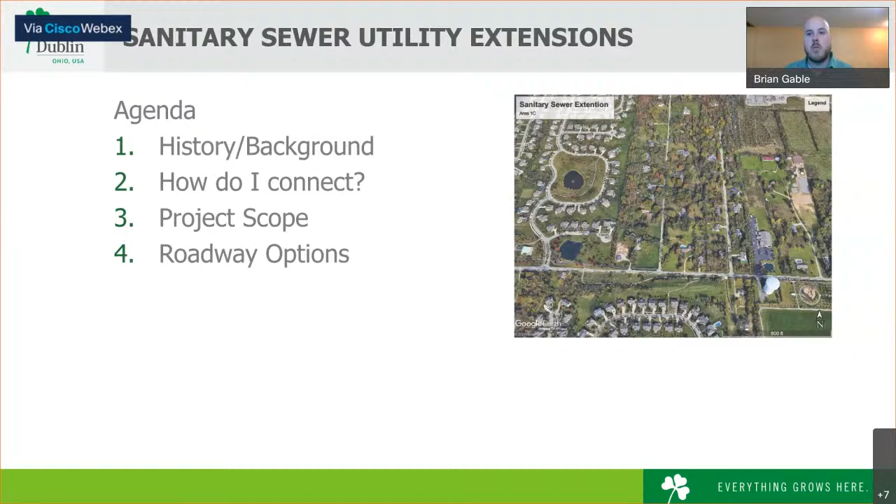As we mentioned last slide, 1B is the focus of the meeting tonight. I'm sure all of you are aware as residents in that area, which is essentially Trails End Drive almost entirely.

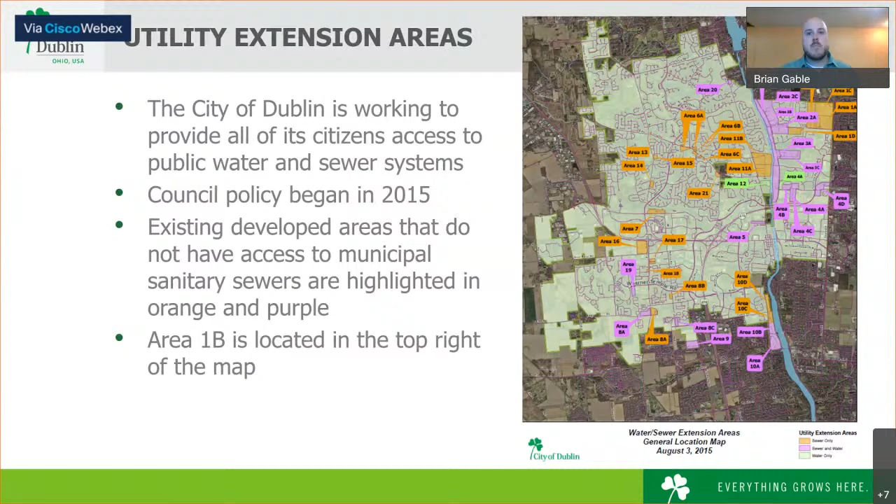The project is going to be 100% funded by the City of Dublin's design and construction costs for public utility extensions. Funding is proposed in the 2022 CIP. I say proposed only because that is something that is accepted by council towards the end of the year. So next year's CIP will be accepted by council at the end of the year. Modifications can be made up to that point.

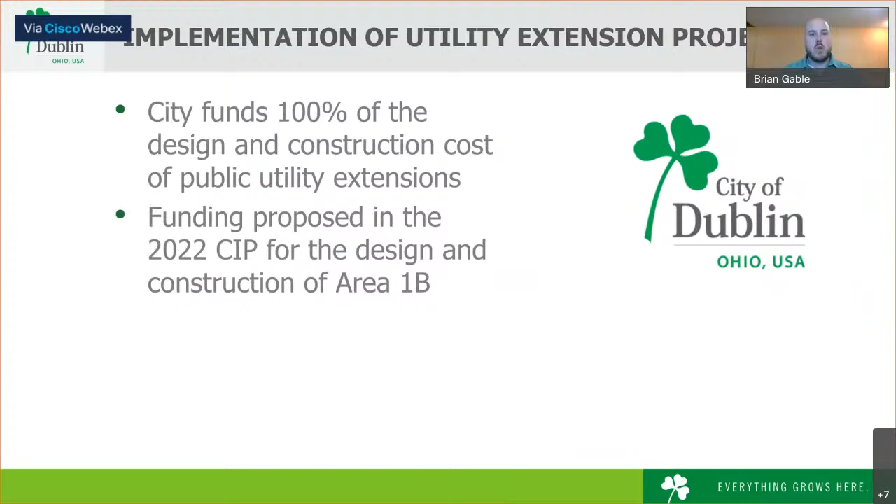So we're pushing for installation of sanitary sewer in Area 1B for 2022. That's very brief history. Obviously there's plenty more that we can discuss, but we didn't need to go into entire detail. Welcome to answer any questions on that afterwards. So let's talk briefly on how to make the connection.

So first and foremost, what will happen is the project will come through and install the sanitary sewer. From there, the residences will be able to make the connection.

So they'll first submit a Dublin right-of-way permit application, then submit a permit and plan for review and approval to the City of Dublin. Once those are accepted, then you'll apply and pay for the Dublin and City of Columbus sewer charges and fees.

The sanitary services and water services are maintained by Dublin, but they originate from Columbus. Columbus has the plants that take care of our sanitary and water systems, hence that's how they have part of their fees here.

So from there, once you have the approved permits and everything else, you can hire a contractor to install your service line from where it'll be left with the project. Then the contractor will coordinate those inspections with both Dublin and Franklin County.

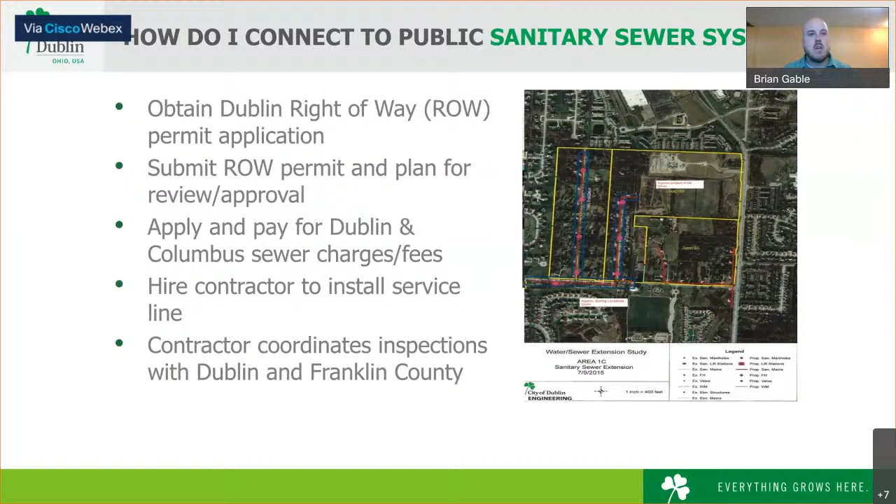A couple things to briefly talk about: the owner responsibility for the sanitary sewer. The sewer main itself is the city's responsibility for maintenance, but the lateral, once it exits the main for the sanitary sewer, is actually the homeowner's responsibility all the way from the main into and through the house.

Property owners are also responsible for the tap fees and capacity charges, which is more of a standard bill. Private service lines from the main to their structure, and then any modifications made interior to the house, would be something the private resident would have.

Meaning if you're switching from a septic system and there was something you had to do to make that transition, your contractor would take care of that, but those fees and costs would be borne by the resident.

One thing the City of Dublin is doing is offering a waiver of 50% off of Dublin's tap fees and capacity charges for the connection, as long as the connection is made within 2 years of notification of availability. Meaning, once the sanitary sewer is fully installed on the street and residents are notified that they're able to connect, there'll be a 2-year window to get 50% off of the tap fees for the City of Dublin.

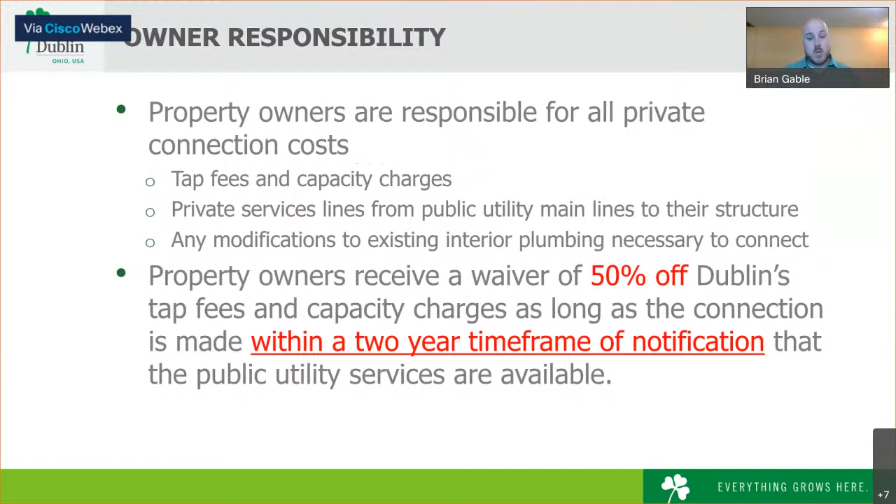Unfortunately, that's not for Columbus's tap fees, as we'll get into on this next slide. So here's the current numbers. These do change slightly over time, so take these with a little bit of a grain of salt. They could adjust from now to when the sanitary sewer is installed, but these are the current fees.

So you see Dublin's charges and Columbus's total about $5,254. With the 50% Dublin waiver, we would get to around $4,149. As I mentioned before, there's an inspection fee, and then you'll have your own private contractor's construction costs as well, for taking the lateral from your home all the way up to the main. Those costs can vary depending on what kind of system you need, anywhere from a few grand to much more if you have to go into a non-gravity fed system.

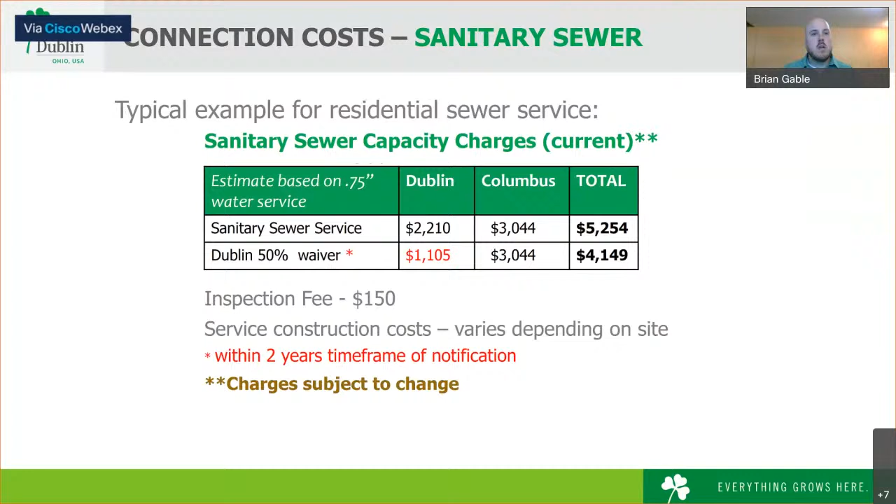So this is just kind of a visualization of what's each homeowner's responsibility.

Since Trails End already has water, I'm sure most of you are aware that the water line up to the Corp Stop line is city responsibility. For us on this project, we're going to talk specifically on the sewer main, and from the sanitary sewer main, where that lateral makes a connection to the main, from there out is the homeowner's responsibility all the way up to the house.

So there are some things that, as you're progressing and making these connections, you'll have to do, such as abandoning your existing treatment systems, extending the laterals, and making adjustments interior as needed.

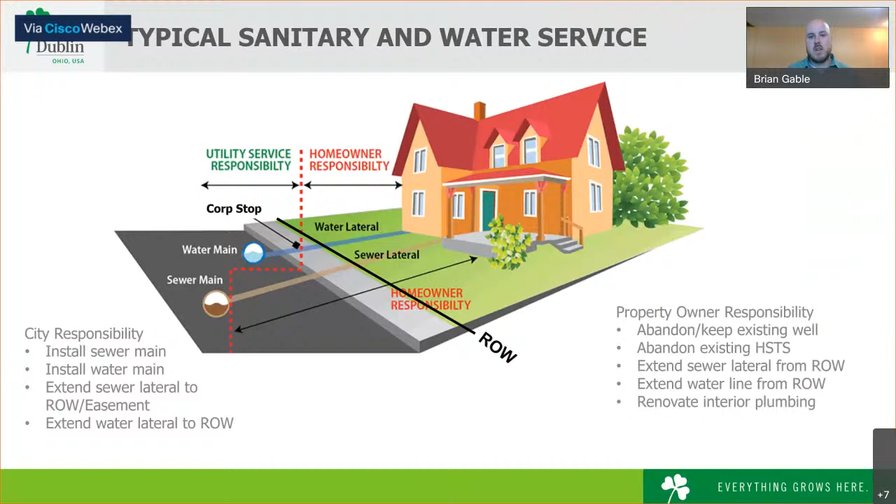So once we finish or get moving along with the project and construction, City of Dublin's engineering staff will send out a sanitary sewer lateral exhibit. This is something that you will need for your permit.

It's one possibility of what could be done. This does not mean that this is the exact layout you have to do, or that it's the layout your contractor prefers. They may want to make adjustments to this, and that's okay. This is just trying to provide this service to help with putting together the permits and exhibits, et cetera.

These will get sent out once the project is actually under construction and you're getting closer to being able to make that connection. We don't want to send these out too early. If the project isn't going to be constructed till next year, finished maybe at the end of next year, you'd be looking at an exhibit from a year and a half ago. So we'll wait closer to construction in order to send these out so you guys have the most current and accurate exhibit that we can provide.

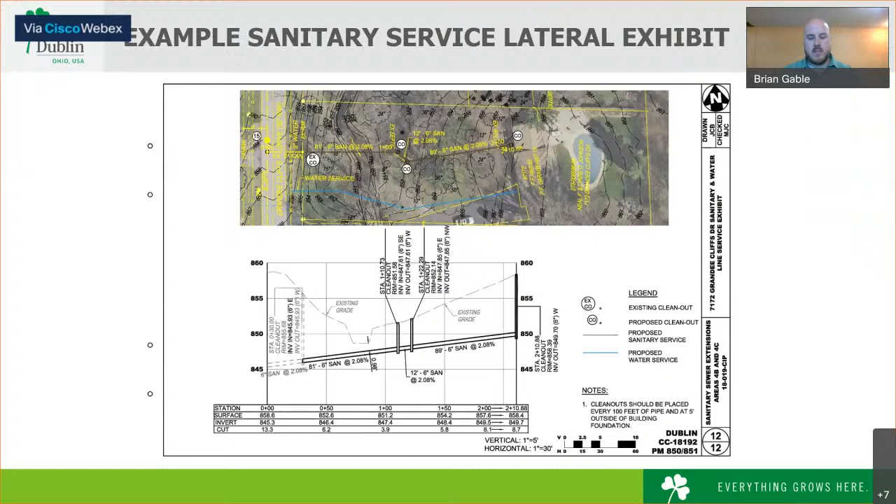So the big question we get often is, do I have to connect to the sanitary sewer? Well, the answer is no. The City of Dublin Code does not require connection to the public sanitary sewer system.

However, there are multiple instances that may require you to make this connection. These are primarily governed by Franklin County Public Health, which would require connection if your existing treatment system is failing, leaking in some way, or is insufficient, or if you require replacement, should there be a sewer main within 200 feet of your property line. Then Franklin County can actually make you connect to that sewer instead of installing a new septic tank. So that would be kind of a main caveat for this system.

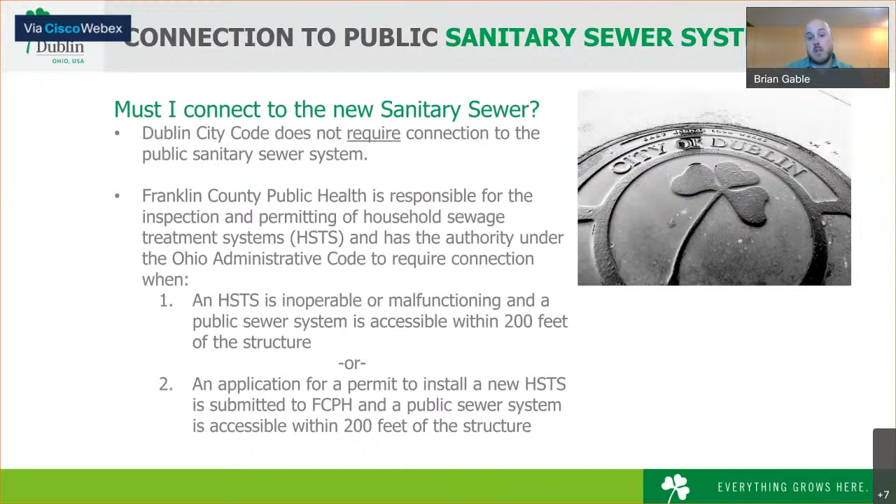So sometimes, if you begin to experience some failure in your system or your septic tank, then you may need to make that connection. So there are several advantages, we think, to being able to have the sanitary system available and connected to your property.

First is it improves overall safety and health of the entire area. This also helps with overall water quality so that you don't have actual leachate into the ground that makes its way close to water lines. So this helps with quality.

It also means less long-term maintenance. You don't have to have somebody come out and pump out or clear out your septic tanks or maintain your grinder pumps or whatever else you have for your particular system.

Having the availability to connect to sanitary sewer will potentially increase your home value. Obviously, as we all know, that depends on the market. And it's an opportunity to invest in what should be a permanent solution instead of one that would be a temporary solution should an existing problem arise with your existing system.

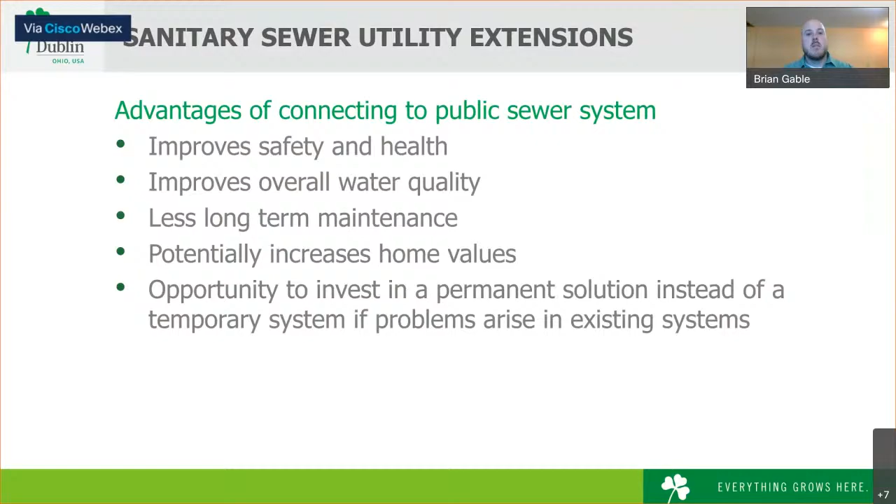So now I wanted to go and discuss the actual specific project scope for Area 1B. This project is actually a combination of capital improvement funds.

So we have the Sanitary Sewer Extension Area 1B, again, primarily Trails End. This was originally planned to be with Glencree in 2021. However, due to a variety of situations, we had to split the two out, primarily due to funding. And we now plan for construction on Area 1B in Trails End in 2022.

The remainder of the funds will actually come from the annual street maintenance program, because we are also planning to reconstruct Trails End Drive. This has been in the program for a few years, intended to be coming this year. And obviously we want to make sure everything occurs in the proper timeline.

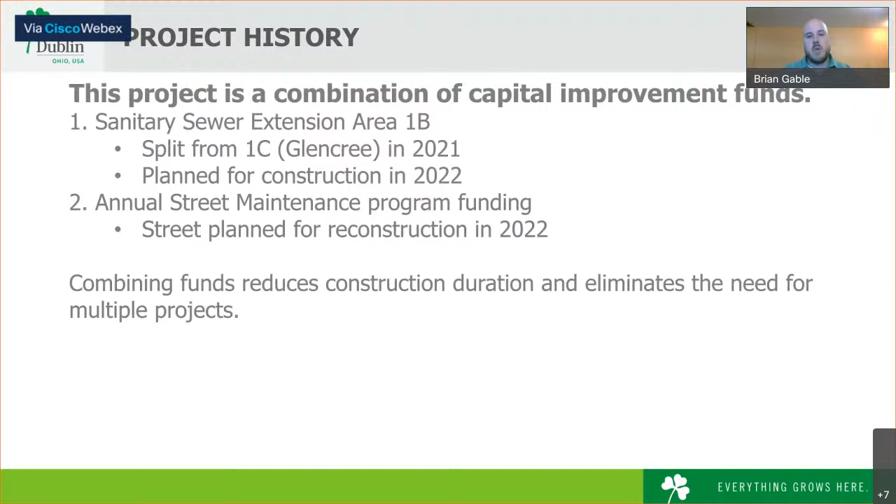So we want the sanitary sewer to be installed, then the street to be reconstructed, just to ensure that we don't build you a new street and then tear it all out the next year. So we're going to combine the two, put them together, hopefully also reduce the overall time frame of the construction on the right of way in front of your property.

So I'm sure most of you are familiar with the location of Trails End Drive. And like I said, Area 1B is primarily Trails End Drive. It includes a couple homes near Summit View Road. So overall, the project scope currently is to install the sanitary sewer along Trails End Drive to give service capacity to all the residents all the way down the street to the very end.

Then we plan to reconstruct the roadway on Trails End Drive. It's kind of reached its usable life, and we need to do some maintenance on it and get a better overall ride for the residents. Then there'll also be some crosswalk and striping signs on Summit View Road. And then currently the project is planning the addition of sidewalk with curb and gutter.

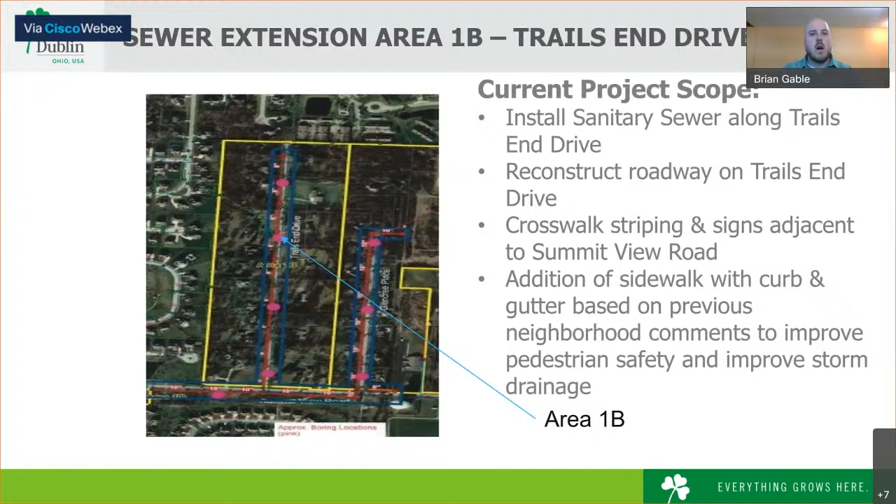This was actually based on previous neighborhood comments that we received into the City of Dublin's engineering department. The intent of this was to overall improve pedestrian safety and improve the storm drainage of the roadway. So this is something we'll certainly discuss as we go along here. But I wanted to just share a few photos that we've seen. So the current roadway is quite small.

It's a maximum of 16 feet wide, and as I'm sure most of you are aware, a lot of the edges of the roadway have kind of deteriorated over time. You have deliveries and school buses, especially, that try to traverse the road, and it's pretty difficult for those buses and vehicles and pedestrians to all be on the roadway at the same time.

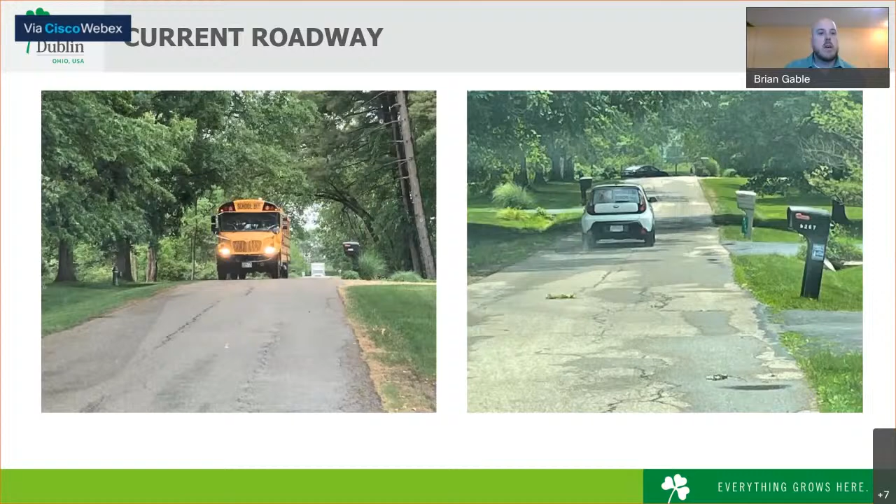So what the project is currently proposing, and this is only currently, is to do some very minor improvements. And overall, the goal is to improve safety for both pedestrians and vehicles.

So the current roadway is pretty narrow, like I said, it's kind of max 16 feet wide. The future roadway would be slightly wider. Nothing that would be incredibly noticeable other than it would prevent vehicles from tracking onto the grass in front of your homes.

The current roadway also has no pedestrian walkway, and so we're proposing to put a pedestrian sidewalk on one side of the roadway in order to alleviate the pedestrians having to travel on the roadway with the vehicles.

It's also quite difficult in the current roadway for two vehicles to pass, especially with school buses. With a slightly adjusted width, we'll be able to ensure that vehicles can pass appropriately without having to get off of the roadway, or at least one of the vehicles to get off before the other can pass. So this is certainly not passable currently, with pedestrians on the roadway if you have two vehicles.

So with what is being proposed, there'd be space for the school buses, particularly to drop students off, so they could get off of the roadway and be able to walk down the sidewalk. And it would allow a walkway for students and/or other pedestrians.

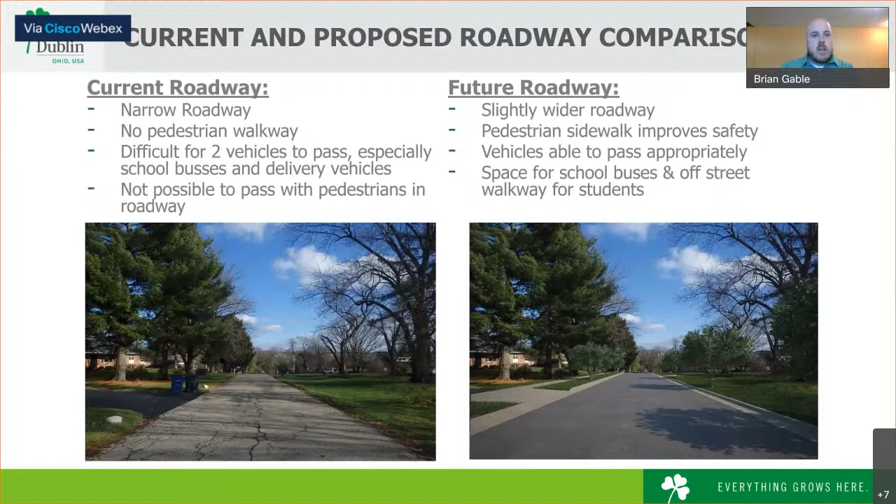So even if we kept everything precisely where it is now, which I believe has kind of degraded over time, the pavement edge is kind of rubbleized and turned more into gravel. When we come through and rebuild the roadway, regardless of how much or little you widen, we're going to have to excavate more than just the pavement width as it is right now.

The base courses sit out a little bit, and then we also have cement stabilization that goes out a little further as well. So just because the edge of the pavement is here, we're going to have a few feet in addition to that in order to ensure that we can support vehicles, delivery trucks, school buses, whatever, along the roadway without having the last couple feet of the roadway deteriorate.

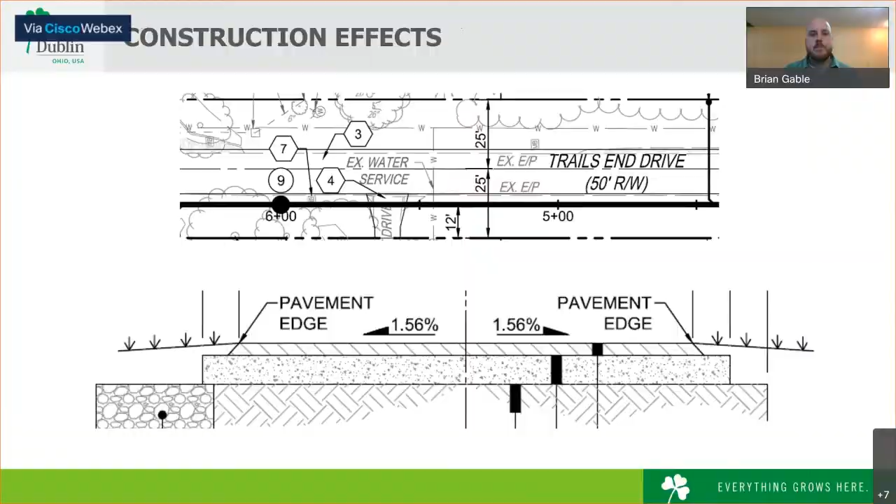So with that, I wanted to drop into some of our potential roadway options and some items that we really want the residents' opinion and viewpoint on.

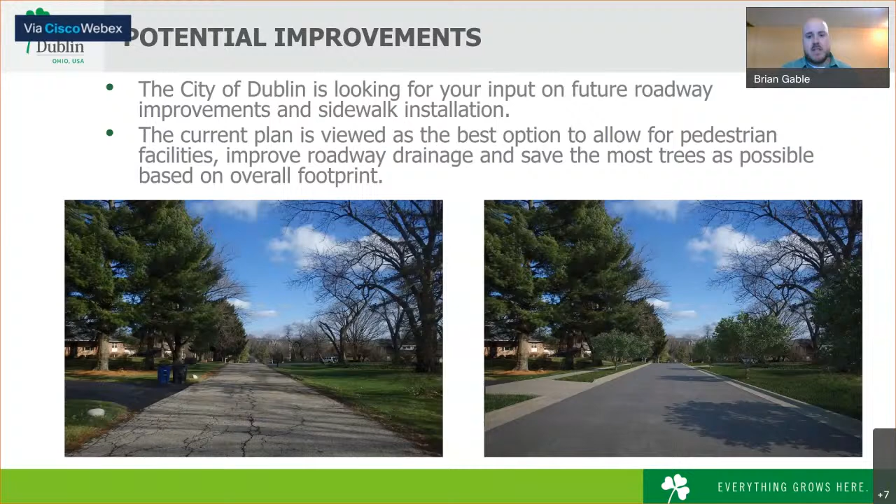So as I mentioned, we've discussed what the potential improvements are, what we're proposing to do for the neighborhood. We really want your input as the resident as to what you want to see happen with your roadway. We're looking for the next 30 years. This is not something we're looking to do next year and then come back and put something in 3 or 4 years. This is the time now if we're going to do it.

We don't come back and reconstruct the roadway generally for 30 or more years. It may get resurfaced in 15 or so, but that would be about it. This is a great time to be able to perform the work that's needed.

Our current plan is what we view as the best option to improve safety, allow for pedestrian facilities, and improve the roadway drainage. Putting a path on the left side, or the west side, of the roadway would help us save as many trees as possible. Obviously, we could put the sidewalk on the east side of the roadway, but that would impact more trees and probably isn't that desirable overall.

On the bottom of this slide, you can see what the existing condition looks like for a similar neighborhood. On the right side, you can see what could happen on Trails End, should that be desired. This rendering would have curb and gutter and the sidewalk on the left side, and would leave nice open green space, not changing too much overall, but definitely improving safety for everybody.

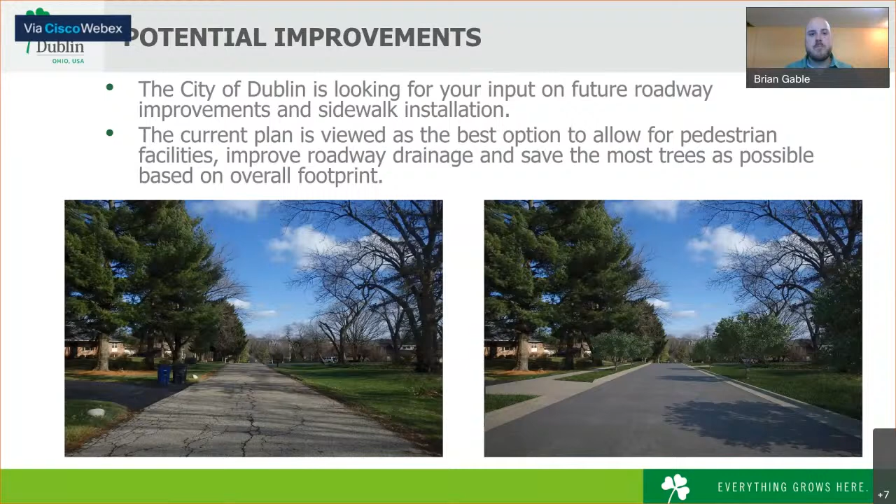So what we're going to have, both on the City of Dublin website for Trails End and physically, we've already sent comment cards today. You should receive those in the mail in the next couple of days, and they have these options on them, as well as spaces for your comments in general. If you have any questions or comments, we would love to be able to answer those for you.